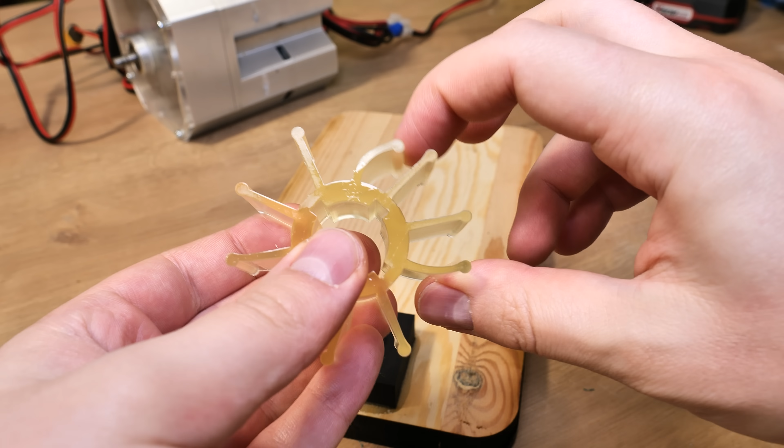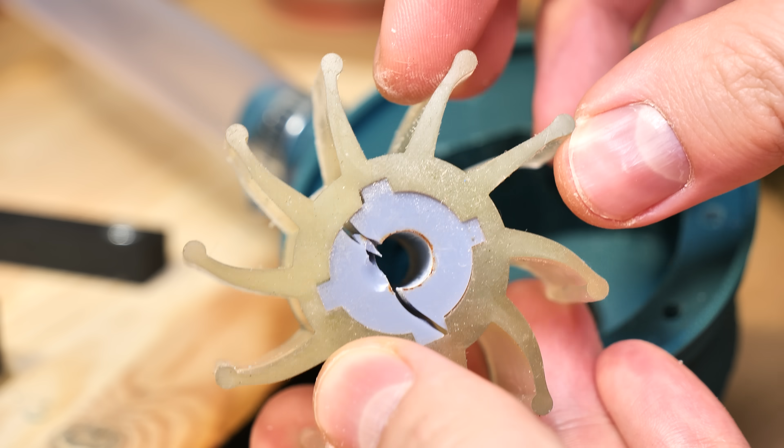In this video we are going to build a 3D printed flexible impeller water pump. Yes, you heard it right, flexible impeller. We are going to make this happen with a combination of resin 3D printers, FDM printers and a laser cutter. There was so much that went wrong, but after a lot of hours redesigning and reprinting, the result was better than I hoped for. So let's get right into it.

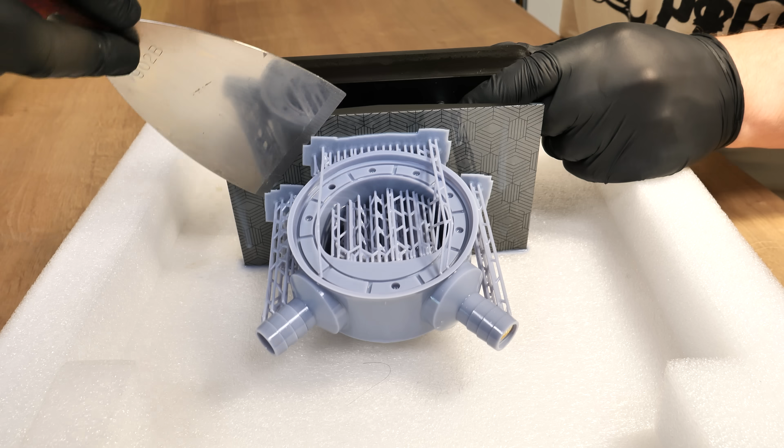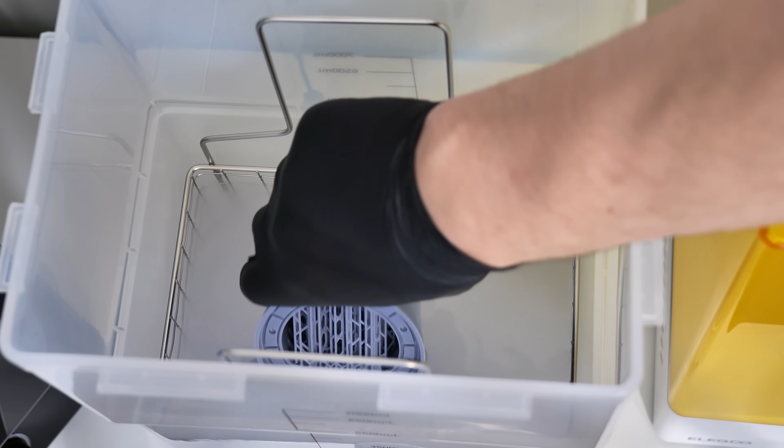First I started printing the water pump housing. I actually printed two. One of them is 3D printed with resin, and for the printer I used Elegoo Mars 5 and Sanliu ABS-like resin. By the way, this is a perfect combo because Mars 5 Ultra is an extremely fast resin printer, and Sanliu ABS-like resin you can print fast without losing any quality and strength. For a little bonus, this resin is almost odorless. I only use ABS-like resins and I have tried a lot of them, and this Sanliu ABS-like resin is the one I stick to. So it was absolutely the way to go, and the final result turned out fantastic.

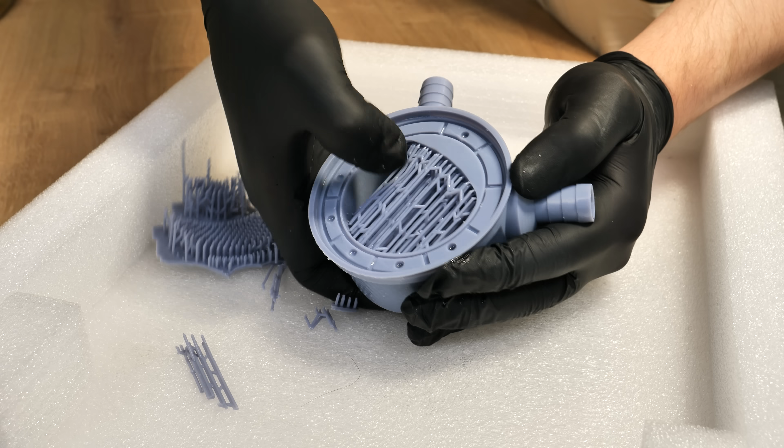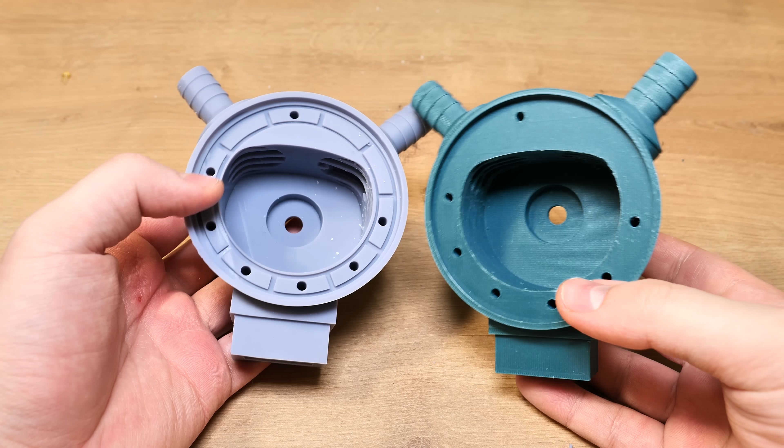The second one is printed with the Bambulab A1, and for the material I used PLA. I printed two pump housings because the FDM printed one I will use for testing different impeller designs, until I find the best one. Then for the final pump I use the resin printed housing. Both of them had a lot of supports, and removing resin supports was pretty satisfying, but the FDM supports were a struggle to get off, especially in this area.

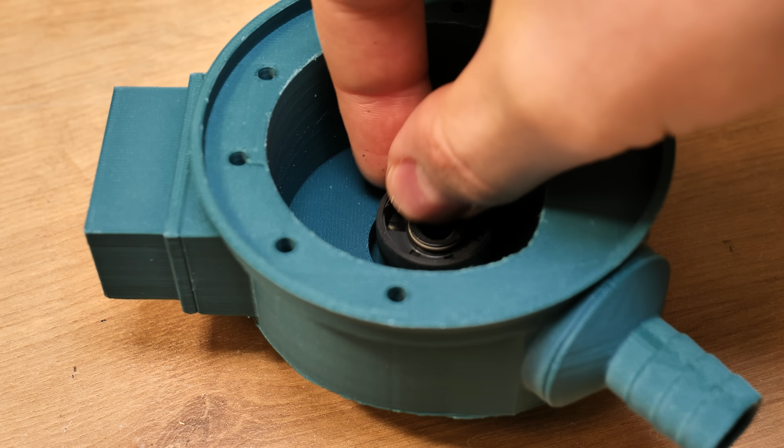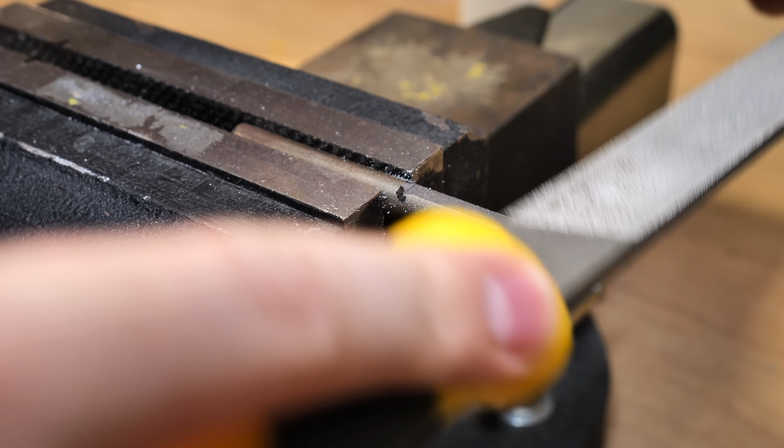Before we move on to the impellers, let's do all the preparations for the water pump. There's not much to do actually. First I installed one shaft seal and a 608 bearing to the pump housing. Then I also needed a shaft. The shaft is 70mm long and around 20mm of it had to be sanded flat, which I did by hand. When I finally got this done, I also printed this thing. This goes on the shaft, and the purpose is to save a little bit of material when I start printing impellers. I can connect the impellers straight to the shaft, but I use this one instead to save some resin later on.

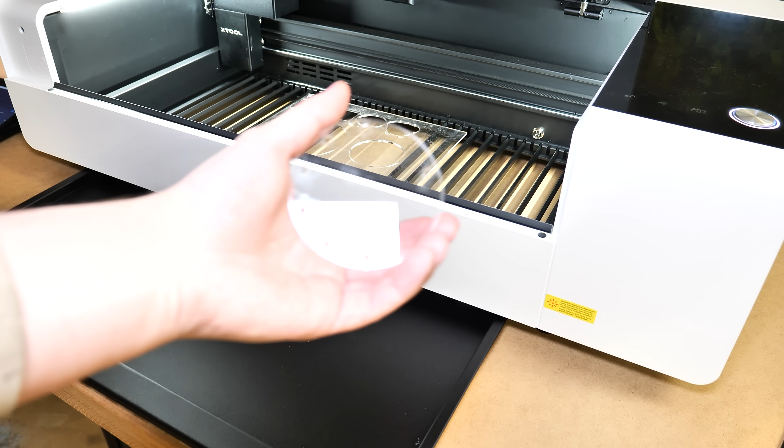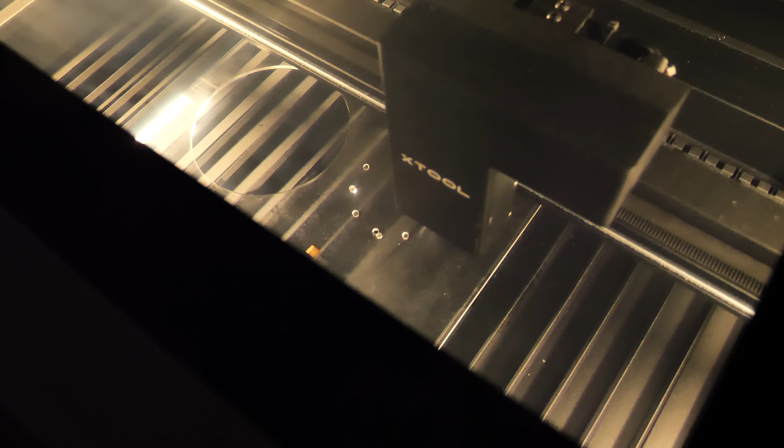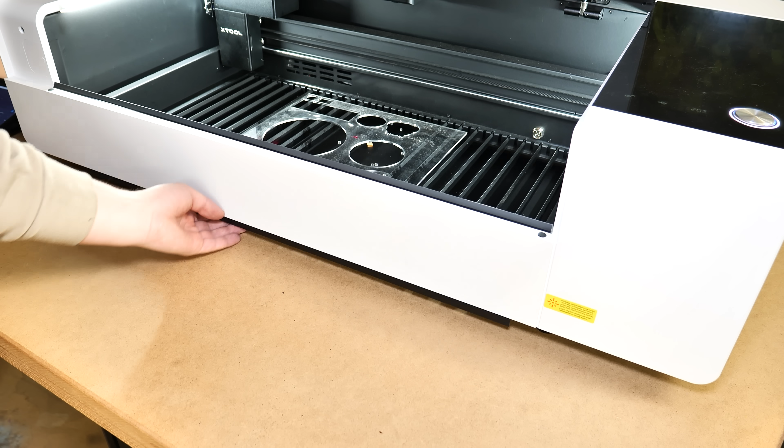Basically everything is done, but the lid is missing. The lid is 3D printable, but because we are doing a video here, we wanna see inside the pump. So I have this acrylic lid, and I made this by myself. The channel got heavily upgraded with the xTool P2 laser engraver and cutter. Usually a desktop laser cannot cut transparent acrylic, but this one has a CO2 laser, and it goes through the transparent acrylic like butter. I have no experience with laser cutters, but this one is so easy to use and it's safe. So now that I have my transparent lid for the pump, we can move on to the impellers.

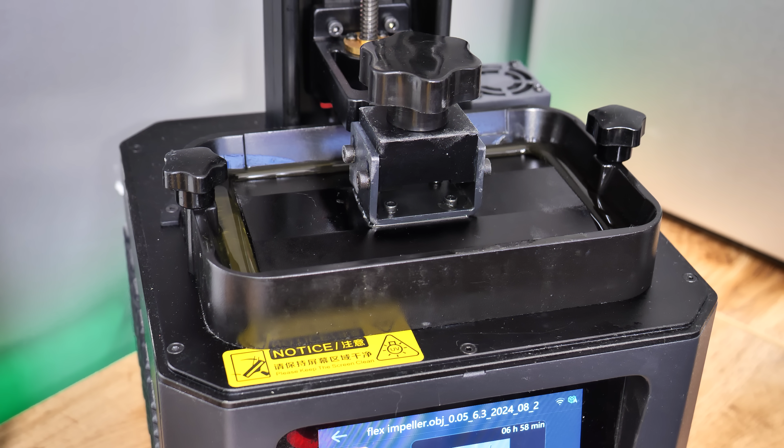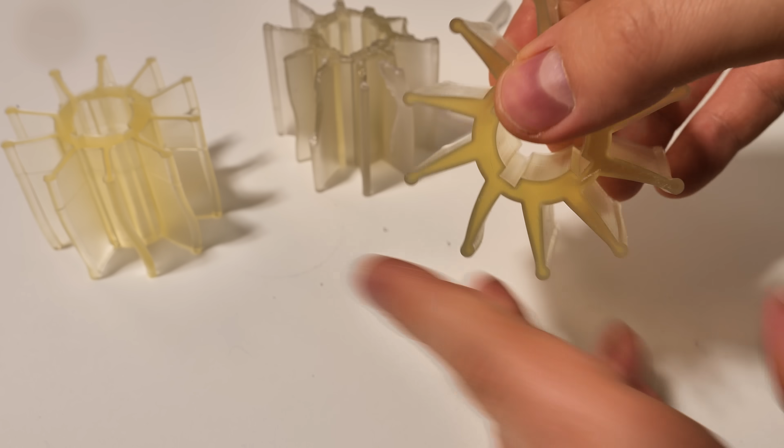The story with the impellers was a lot of experimenting. My idea to get this pump working exceptionally well was to use flexible resin. I was thinking it's like rubber, but it turned out to be actually a little bit different. This is my first print with flexible resin ever, and it feels really weird. It flexed for sure, but it took so long to restore its original position. This is not ideal for this water pump at all. So I printed more test prints, increasing the thickness of the blade, hoping the extra material would help restore the original position. Well, it did, but it's also way harder to bend. It just wouldn't work in this pump.

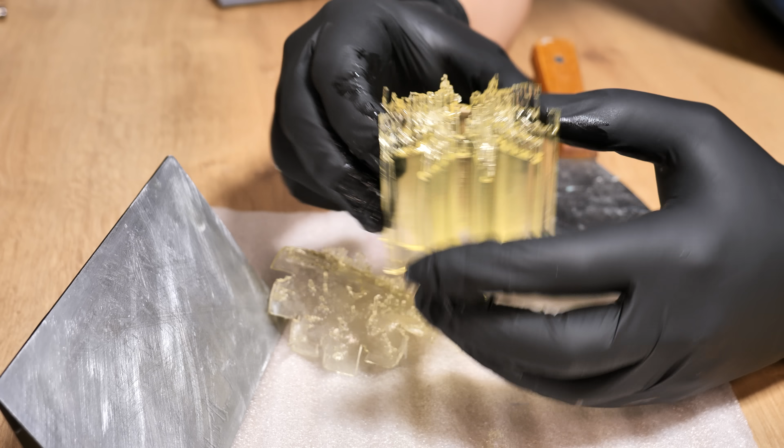Also I printed this one on supports, and this was a really bad idea for this resin. First of all, it was really hard to remove. I had a hard time understanding which part was the model and which were supports. Also the support side broke so easily, like silicone or something. So this one is also unusable for that reason.

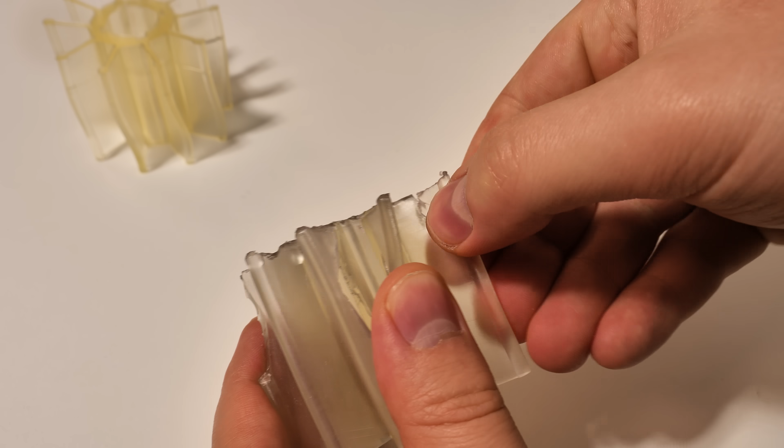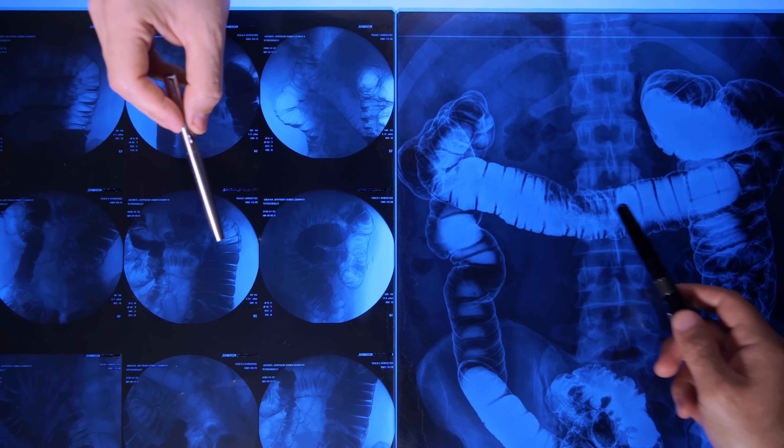I started feeling stressed and pressured for not getting this right. Stress is really bad for your mental health and physical body. For some people it can trigger physical problems like IBS. I am one of them. Every time I feel anxious, stressed or pressured, my gut starts hurting. This makes me even more stressed, which makes my gut even worse, and the cycle continues. This is called the gut and brain axis. And of course dealing with anxiety, especially when it's tied to a physical condition, can be incredibly challenging. But it's important to remember that you don't face those struggles alone.

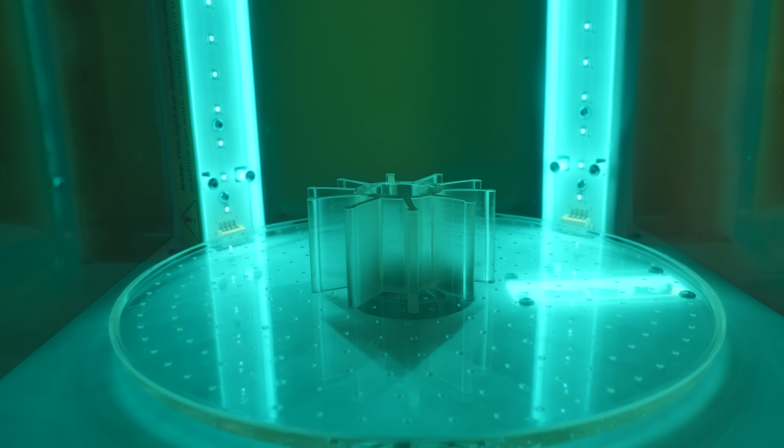I'm going back to the first design, but I do one thing differently. I cure this way for a shorter period of time than before, only 1.5 minutes. Now it's way better and it actually flexes. So I'm going for it and assembling the water pump.

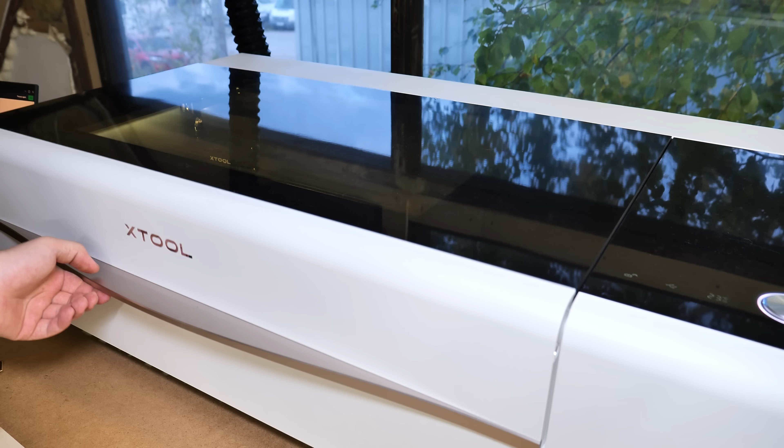I want to power the pump with my 4-motor gearbox, but I need somewhere to mount it. So I went back to my laser cutter to cut a nice wood plate. For the wood I chose 20mm thick pine wood, something I had lying around. I'm not going to lie, I'm a complete beginner with laser cutting, so I was still testing the correct settings.

I found 100% power and 3mm per second with 2 passes should work fine. So I imported my sketch and set everything up. It was a 2-minute job because this machine is so fantastic. With 2 cameras and automatic material measuring, even a beginner like me finds this machine really easy to use. So I gave it a go. It took around 7 minutes because the cut speed was so low, but at the end it almost went through. I should have cut it a little slower, but this kind of oopsie can happen to anyone.

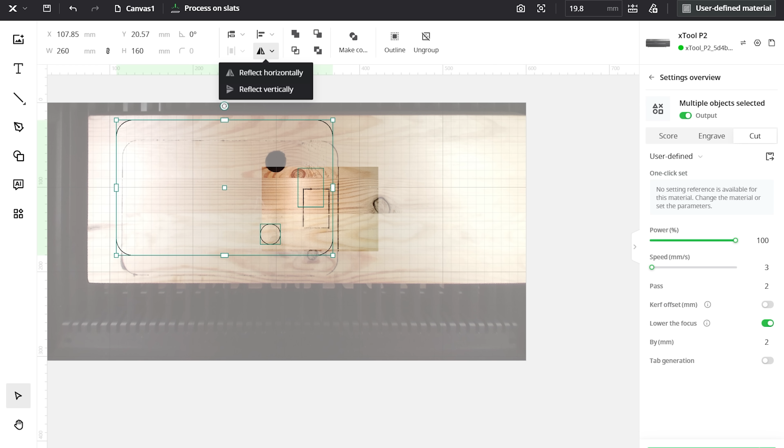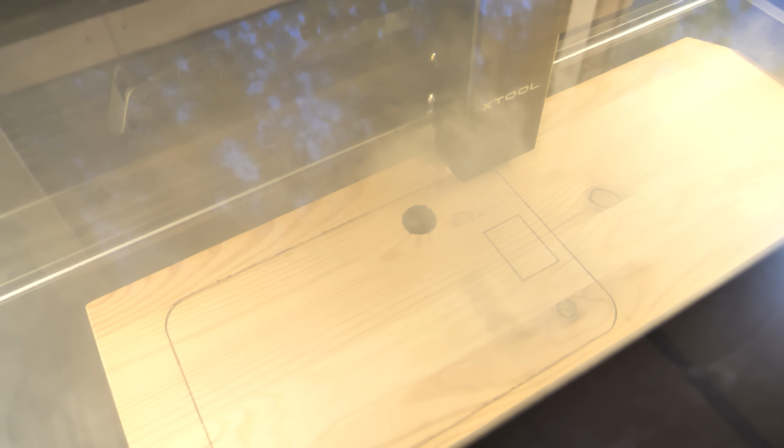Let me show you how easy it is to fix this with this machine. First I flipped the wood plate and placed it back into the xTool. Then I took the same sketch and flipped it in software too. Now I could see the lines where it almost got through, and I matched those lines with the sketch lines. I also zoomed in hard and used the high quality camera to match this as well as possible. When that was done, I changed the cut settings to 100% power and 15mm per second with 1 pass, then sent it back to the machine and crossed my fingers. When it was done, boom, I had my mount.

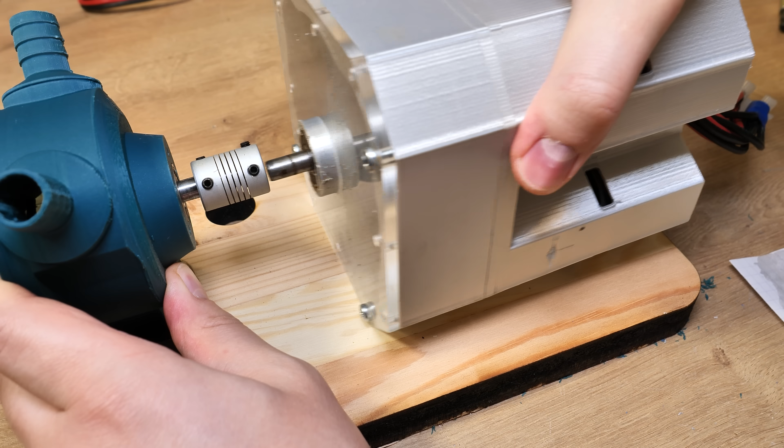Now I epoxy glued one 3D printed piece to the wood plate where the pump would later stand. I also connected my 4-motor gearbox to my water pump with a coupler and secured the gearbox to the wood plate. And now let's see, does it even work?

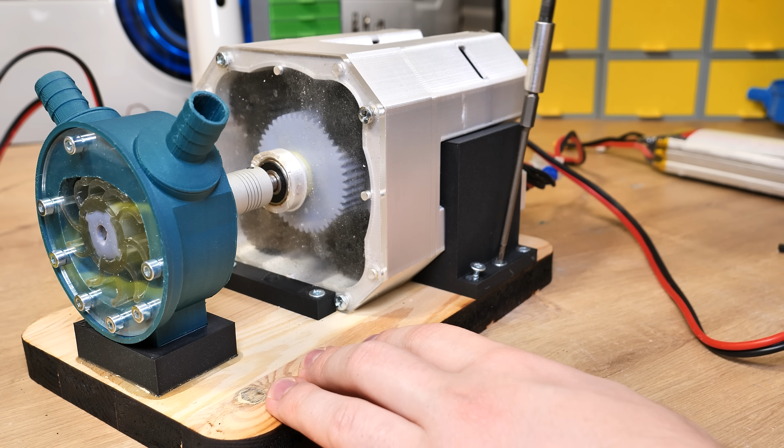Unfortunately, no it doesn't. The gearbox has some issue. I'll fix this later, but for now I'm going to use my power drill. This seems to work, but I don't want to run it dry too long. So let's see, will it pump some water?

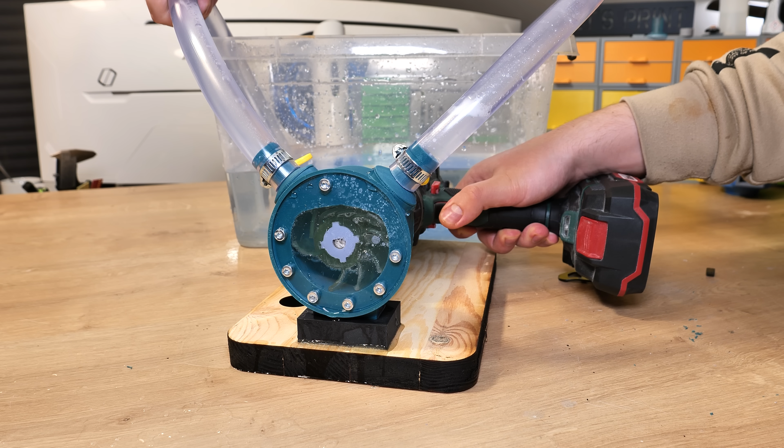Well, it definitely does, but now we have an even bigger issue. I don't mean leaking, that's expected. But look inside the pump: half of the vanes are broken and snapped right off the impeller. Obviously this makes the impeller completely unusable.

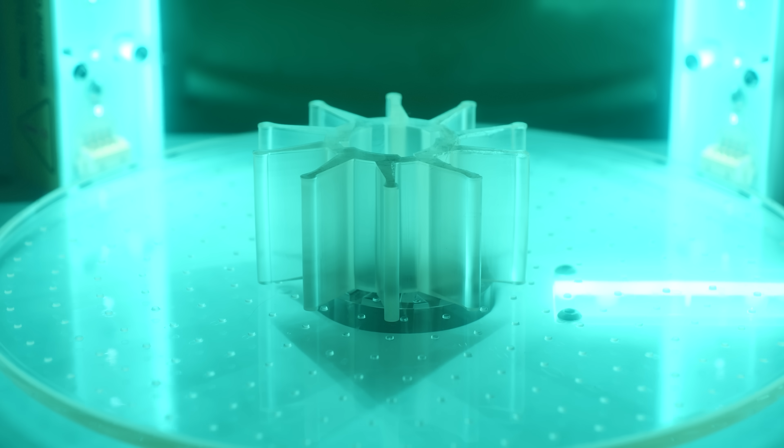But I wanted to give one last chance for this resin, so I 3D printed a new impeller with thicker blades. I also fixed my 4-motor gearbox, so let's see how it goes now. First of all, this impeller is way harder to turn, so my gearbox can't handle it. I switched back to the power drill, but it's so hard to turn that even the power drill can't handle it. Also the middle section broke. So the story with this flexible resin ends now.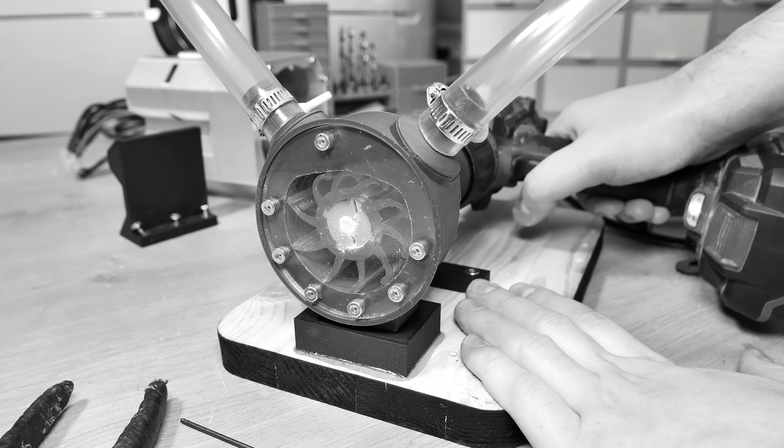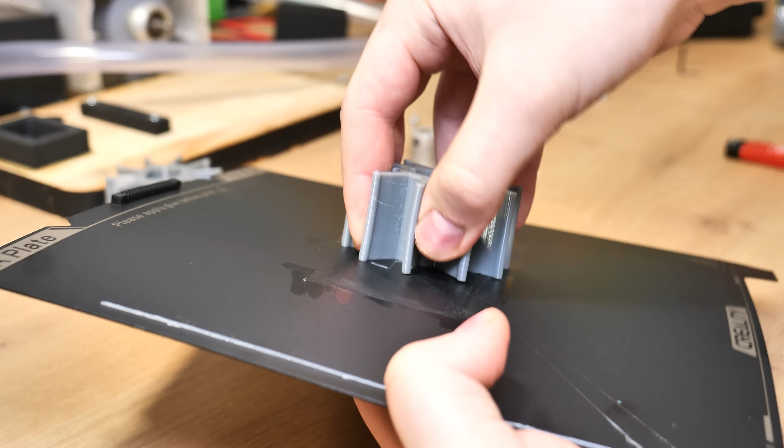And now we're going to use one of the strongest materials you can 3D print at home: TPU. TPU is also flexible, but it's a mega strong material, which should be excellent for this application. So I 3D printed 2 impellers with my Creality K1C, slightly different designs to see which works better for this water pump. I started with the thinner blade impeller, and because it worked so well I didn't even test the second option.

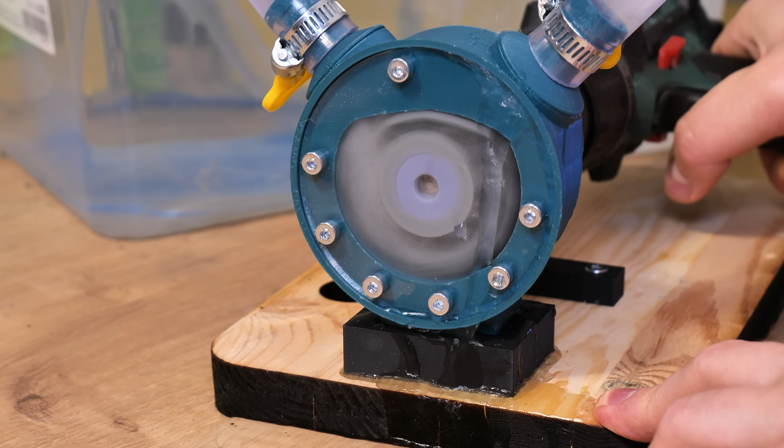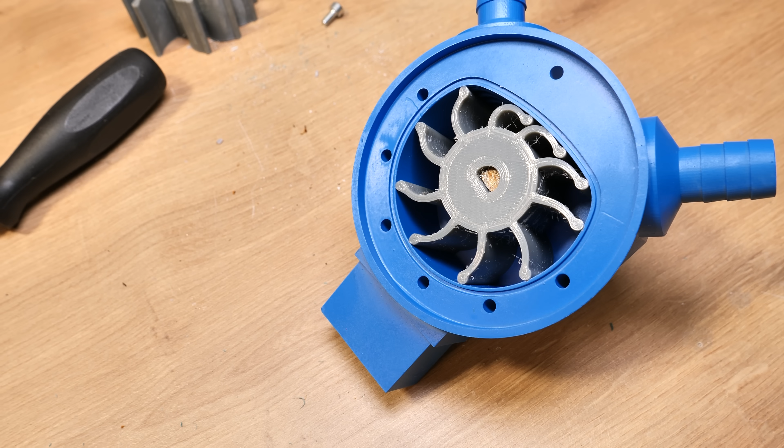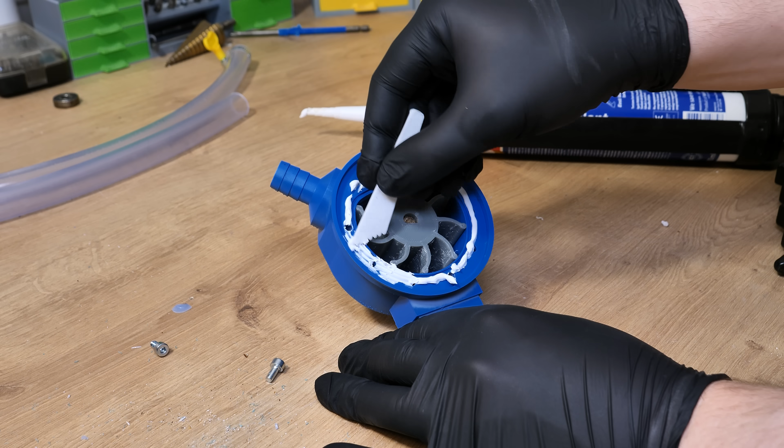Before I assembled the final water pump, I made one last change: I removed the middle connection piece, so now the impeller goes straight to the shaft. With that settled, I assembled the final water pump, printed with Sunlu ABS-like resin, and to increase performance I painted it blue. The assembly is exactly the same as before, but the key difference is silicone, which I used to seal the lid. This should make the water pump completely leak-proof, but also harder to disassemble if needed, which is why I didn't use it earlier while testing the impellers.

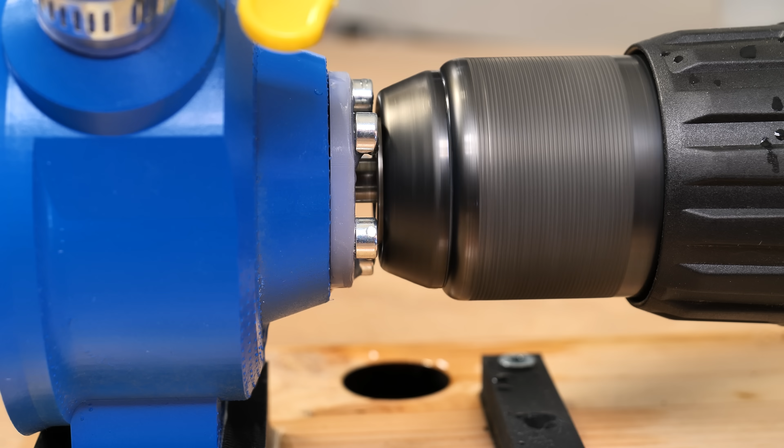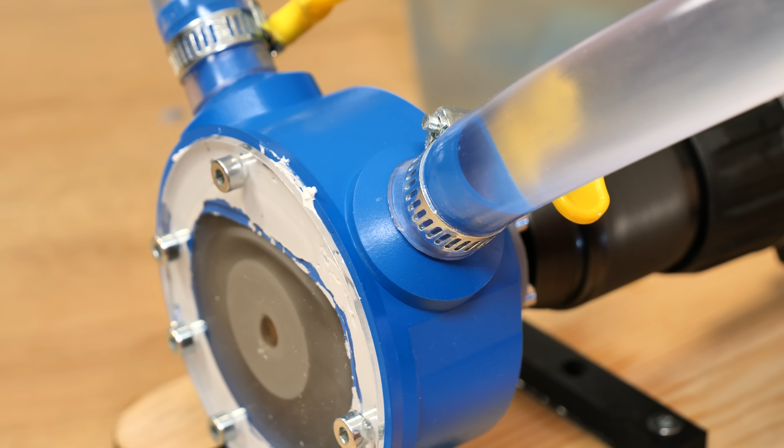But now let's finally see if this will pump some water. Now finally, this water pump works, but despite all my efforts to make it leak-proof, some water still manages to get through the lid. It's not severe, but it leaks.

Even so, this pump performs extremely well. First of all, it self-primes, which is already a big deal. I've built this type of water pump before, but the result was never as good as it is right now. I really wanted to make use of my flexible resin, but this wasn't it, and the TPU saved the project.